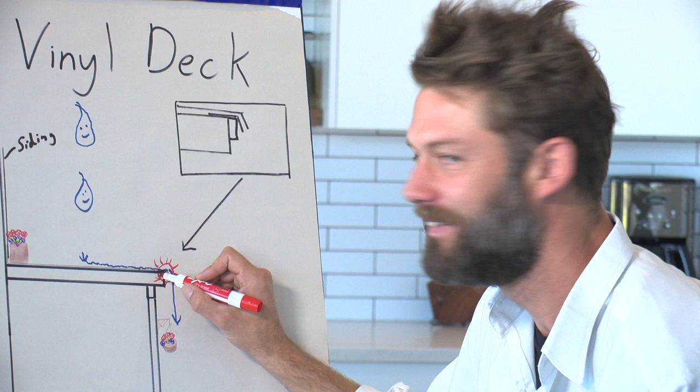And look at that happy little sun.

Today on Well-Built Home, Stefan is going to teach us about vinyl decks. When you walk out onto a deck, what are you looking for? What do you see? Well, what you can see from your back deck is really important. But when you're done looking out, look down. What are you standing on?

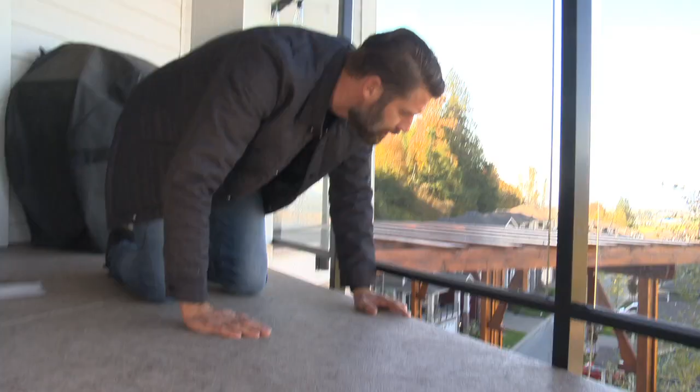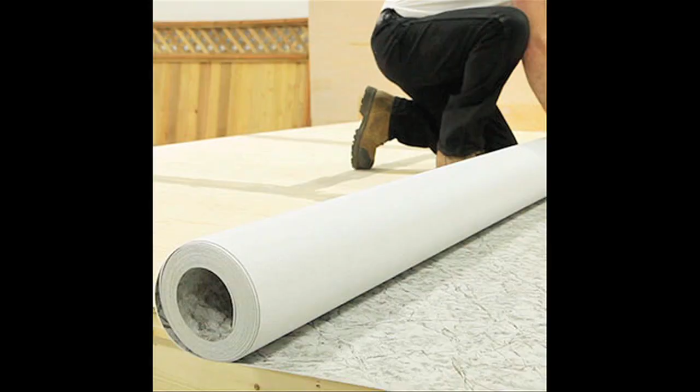Oh, hey. I was just looking down here and I noticed that I'm standing on vinyl. What the heck is vinyl? What's vinyl, you ask? Vinyl is a sheet membrane that comes in rolls, something like an exterior flooring material. It's applied over plywood to create a low-maintenance, waterproof sun deck.

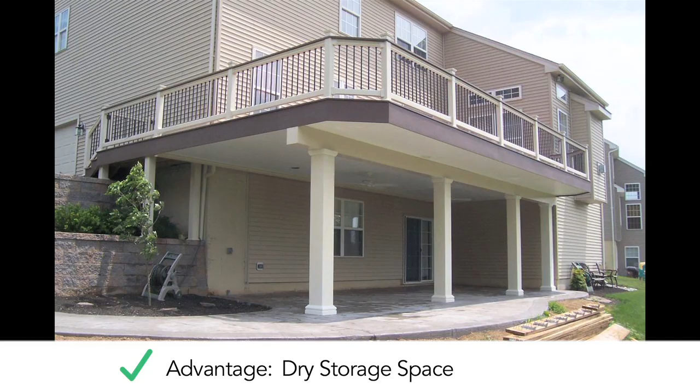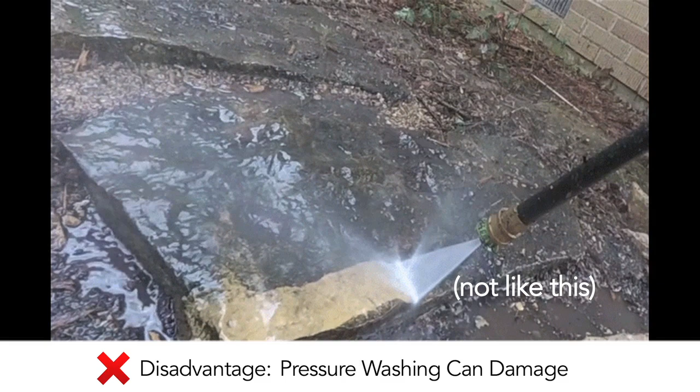Some of the positives to vinyl decking are it's affordable, waterproof, low maintenance, slip resistant, antifungal, and it can create a dry storage space underneath. Some of the disadvantages are that it can rip or tear. The seams can separate if they're not welded properly. You need to be very careful when you're pressure washing so that you don't disturb the fibers, and make sure that you test chemicals before they're used on this surface.

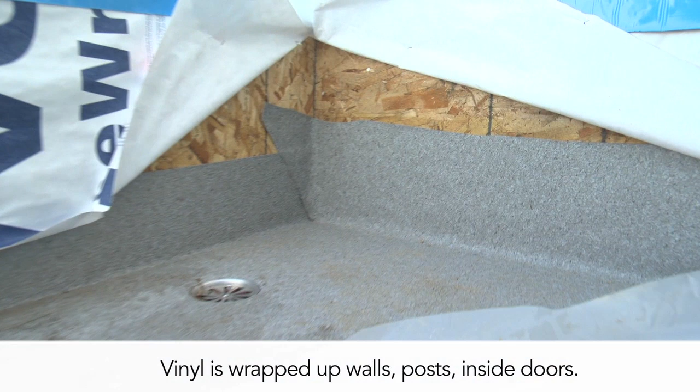Let's take a look at a vinyl deck from the top view. If you can, make sure the vinyl is wrapped up the walls, the posts, and the vertical surfaces, and into doorways. Make sure that the seams aren't separating. They should be hot air welded to prevent this. Check that there's no big bubbles.

Make sure that the product isn't deteriorating. Check that there's no screws through the top. If there are, there should be a tapered block under the vinyl. In our area, all railings are required to be side mounted.

Now let's take a look at a vinyl deck from the side view. The most important thing is that you see a proper flashing detail with a drip spacer behind it, like this.

Aw, look at this little guy.

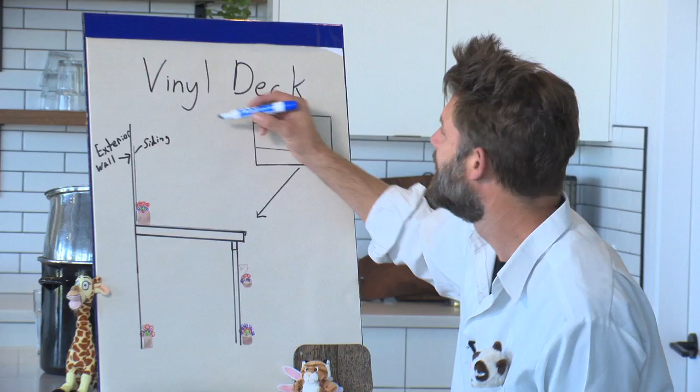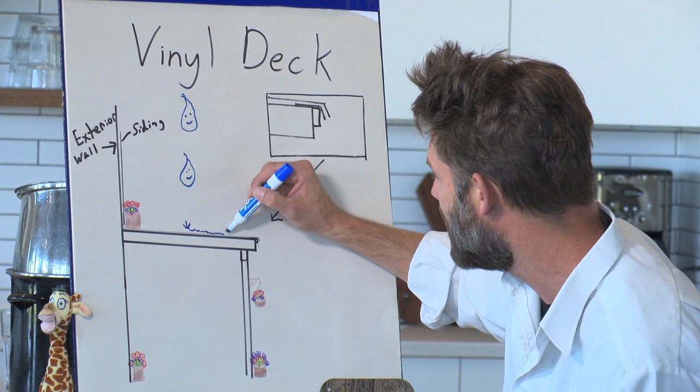So what is a drip spacer, you might ask? Well, let me show you. Sometimes it rains. And when it rains, happy little raindrops fall from the sky all happy, and they fall down and they land on the deck. Now, once they land on the deck, they run along the deck, look at them, the water is happily running along the deck. And what does it do when it gets to the end? It falls off.

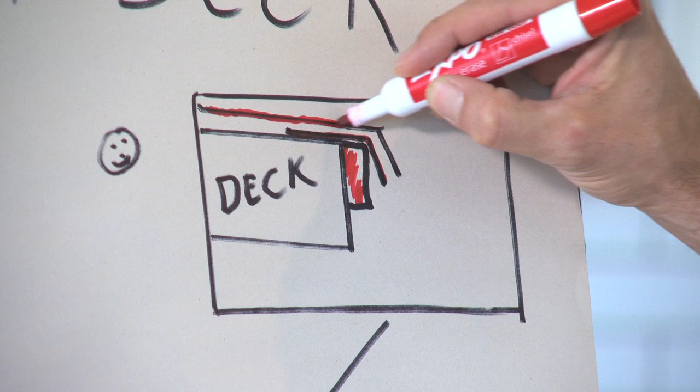So this is our flashing, and this is our drip spacer, and our vinyl decking gets glued on top so that when it rains, the happy little drops will run down our deck and off, and they fall down and don't rot our deck.

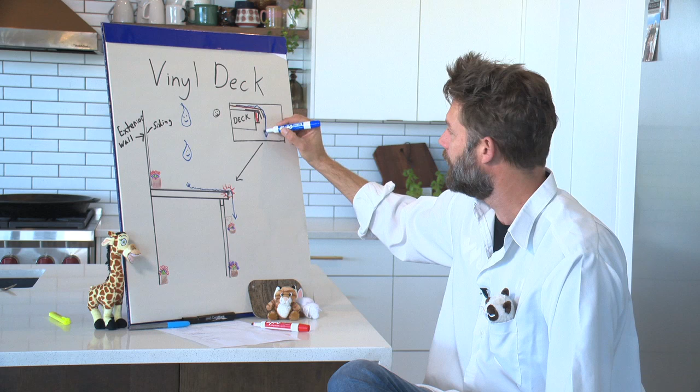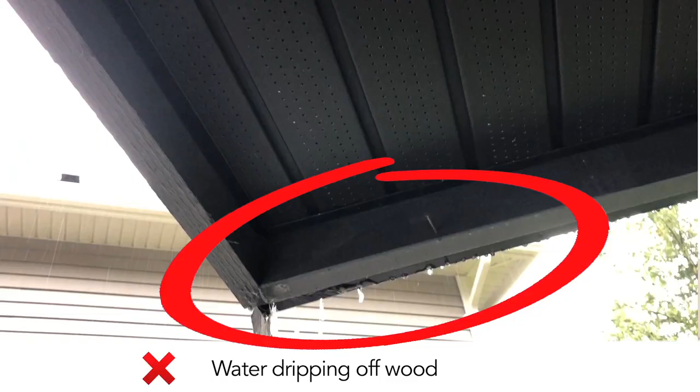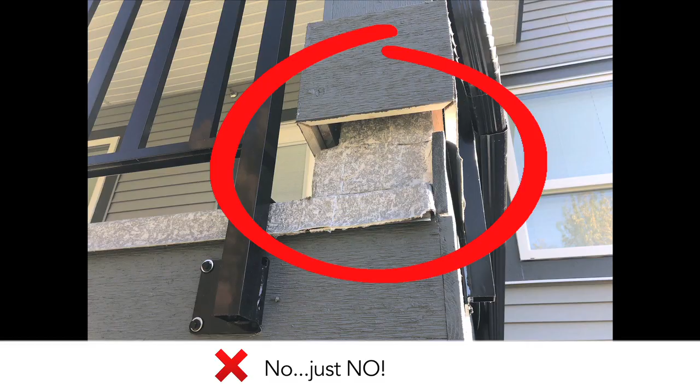Have a look at the deck from the bottom. You should be able to tell that it's dry. Look for signs of water stains. If it's a newer home, check to see who built the home and who built the deck, and make sure they're good at what they do. We just want you to know what to look for, because you only get what you pay for if you know what to look for.